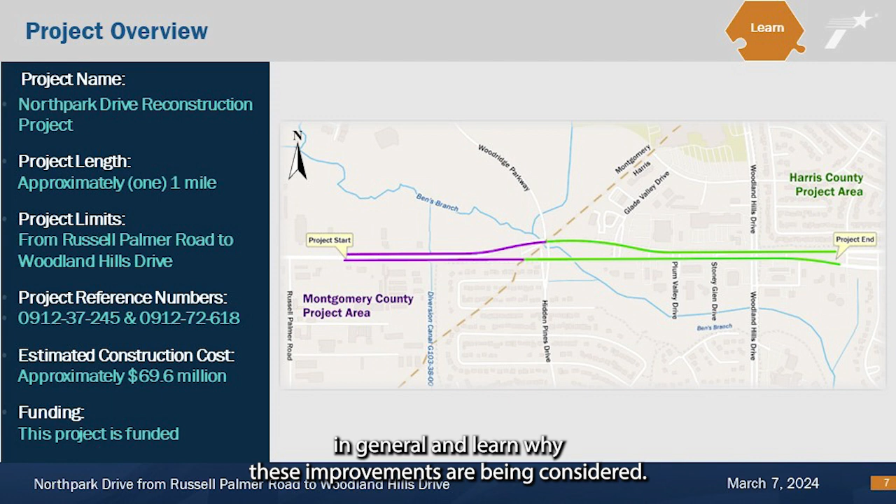As you can see at the top of this slide, we now have a Learn puzzle piece. In this part of the presentation, we will discuss the project in general and learn why these improvements are being considered. The proposed Northpark Drive reconstruction project is located within Harris and Montgomery Counties.

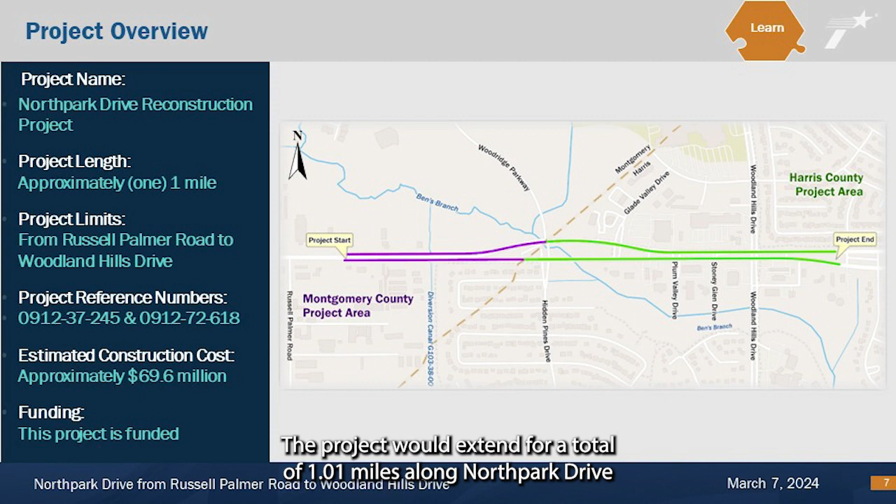The project would extend for a total of 1.01 miles along Northpark Drive from 750 feet east of Russell Palmer Road to 800 feet east of Woodland Hills Drive. The estimated cost of the proposed project is approximately $69.6 million, which would be funded with a combination of federal and local dollars. This information can also be found in the project handout for quick reference.

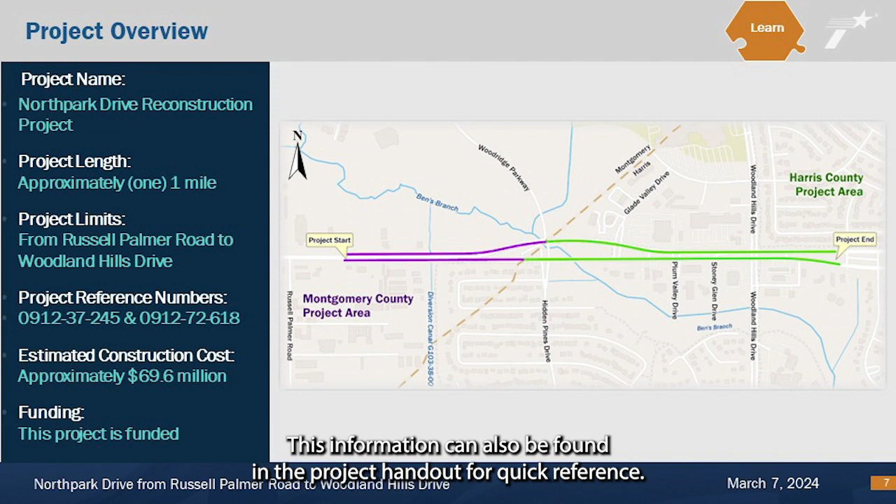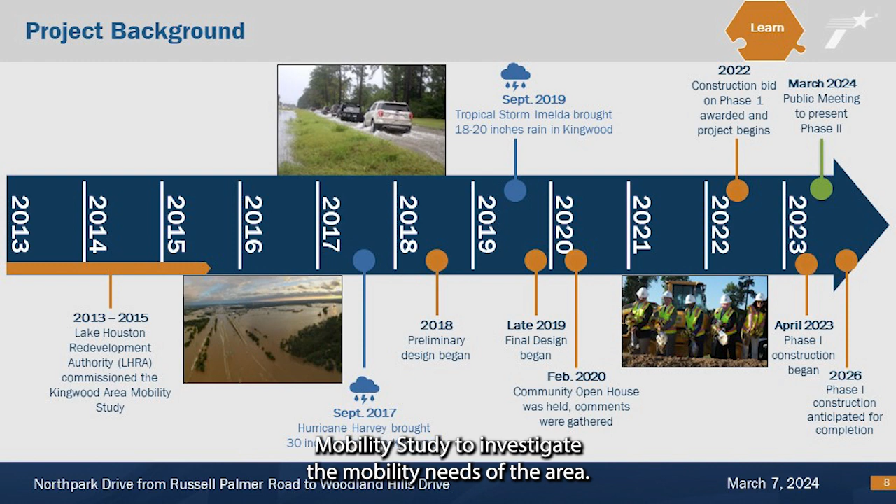For background, in 2013 the Lake Houston Redevelopment Authority, LHRA, commissioned the Kingwood Area Mobility Study to investigate the mobility needs of the area. At the conclusion of the study in May 2015, the Northpark Corridor project was recommended.

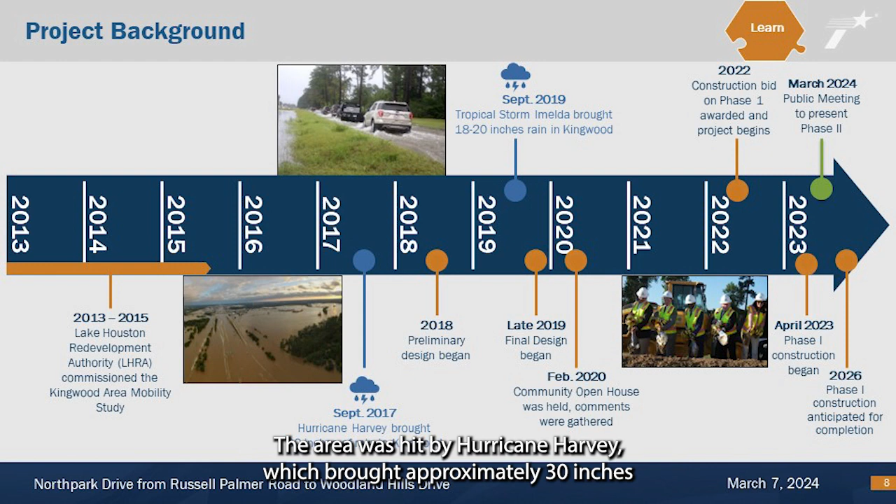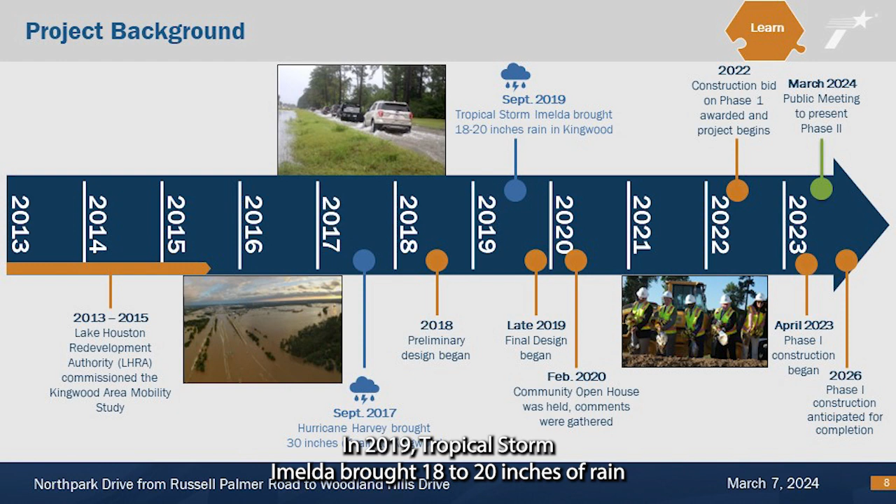In September 2017, the area was hit by Hurricane Harvey, which brought approximately 30 inches of rain in 4 days, affecting several neighborhoods near Northpark Drive. In 2019, Tropical Storm Imelda brought 18 to 20 inches of rain that caused intense flooding, affecting residents, transit, and accessibility.

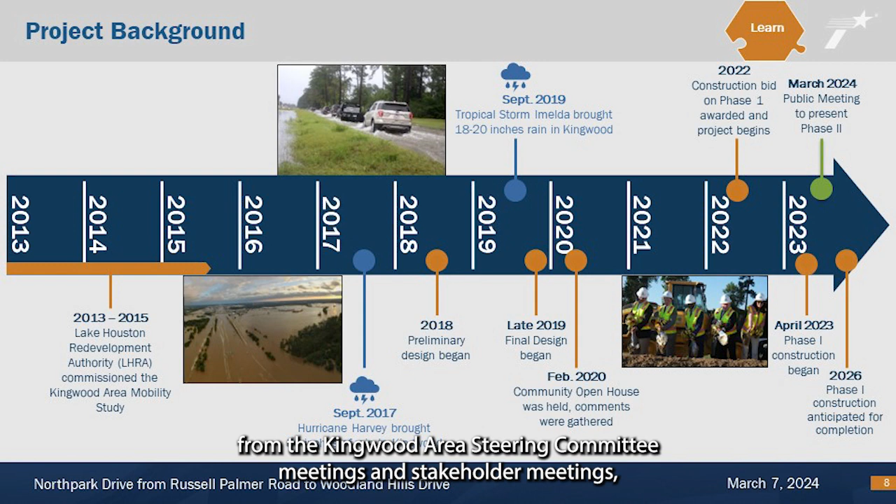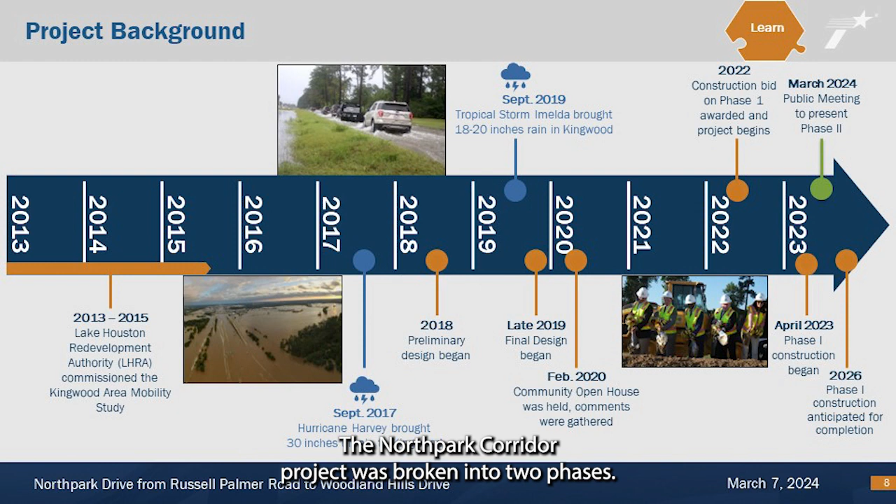This reinforced the need for drainage and construction improvements to Northpark Drive. After these flooding events, and because of continuous feedback from the Kingwood Area Steering Committee meetings and stakeholder meetings, Northpark between I-69 and Woodland Hills Drive was determined as a priority improvement project. The Northpark Corridor project was broken into 2 phases.

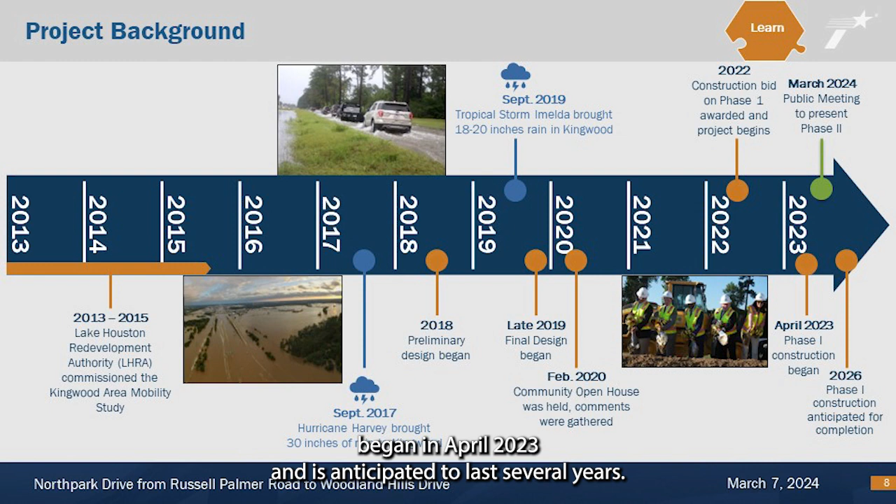Construction on Phase 1, from IH-69 to just east of Russell Palmer Road, began in April 2023 and is anticipated to last several years. This presentation will introduce Phase 2, from 750 feet east of Russell Palmer Road to 800 feet east of Woodland Hills Drive.

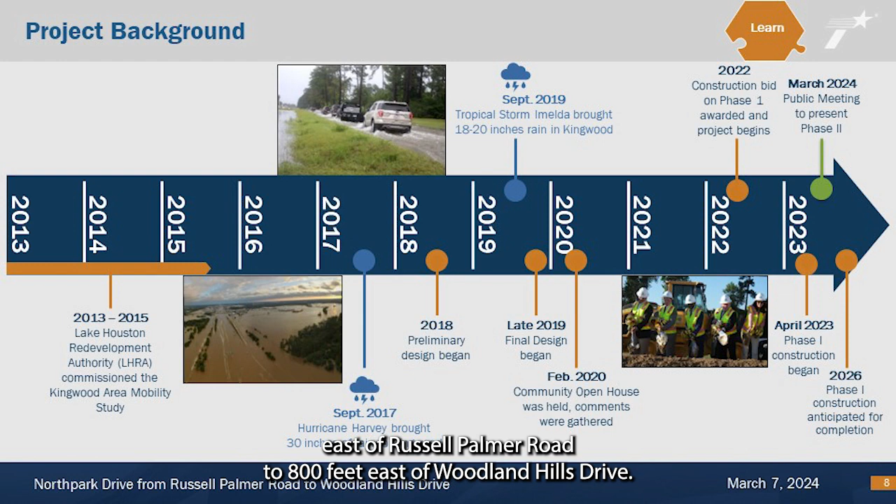When completed, Phase 1 and 2 of the Northpark Drive Corridor project would serve as the only dedicated all-weather event evacuation route for the residents of Kingwood.

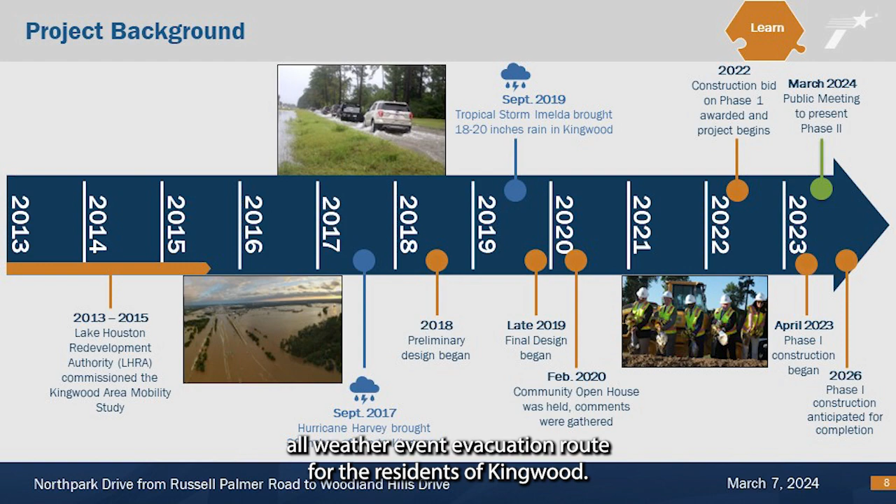This slide shows a zoomed-out visual and the boundaries of the 2 phases of the Northpark Corridor project. Phase 1 shows the Northpark Overpass Project, or Western Phase, in blue, and indicates Northpark Drive at Loop 494 to just east of Russell Palmer Road. This phase is locally funded by the Lake Houston Redevelopment Authority and the City of Houston, TIRZ 10.

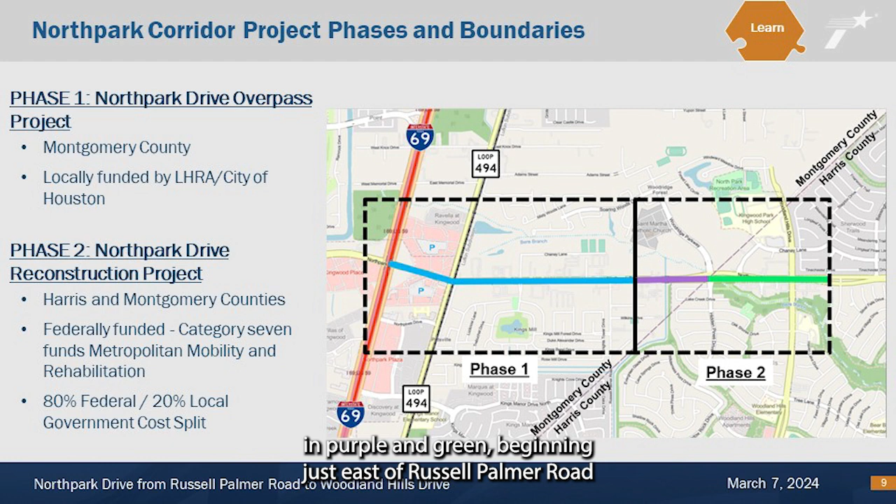The current Phase 2, or Eastern Phase, shows the Northpark reconstruction project that we are presenting today, in purple and green, beginning just east of Russell Palmer Road on Northpark Drive and ending just east of Woodland Hills Drive. This phase is federally and locally funded through a Category 7 grant and local funds.

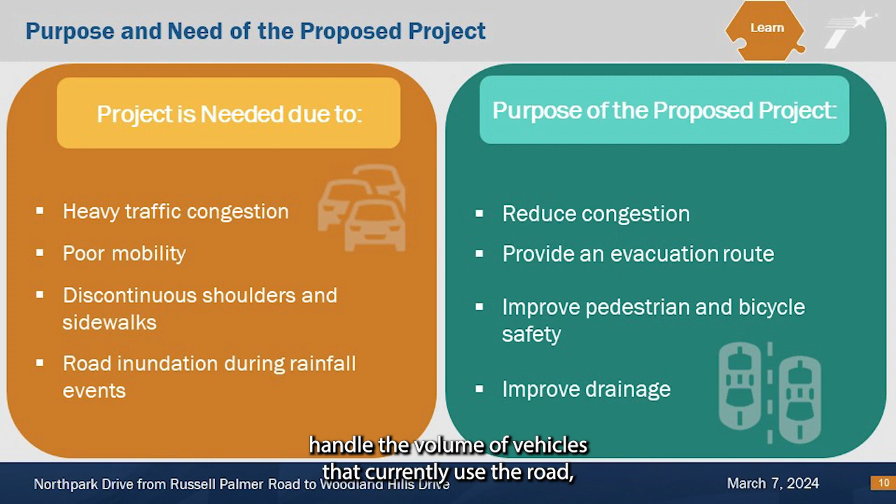The Phase 2 Northpark Drive reconstruction project is needed because the existing number of lanes on Northpark Drive do not efficiently handle the volume of vehicles that currently use the road, which results in heavy traffic congestion. As the area continues to grow, this congestion is expected to worsen.

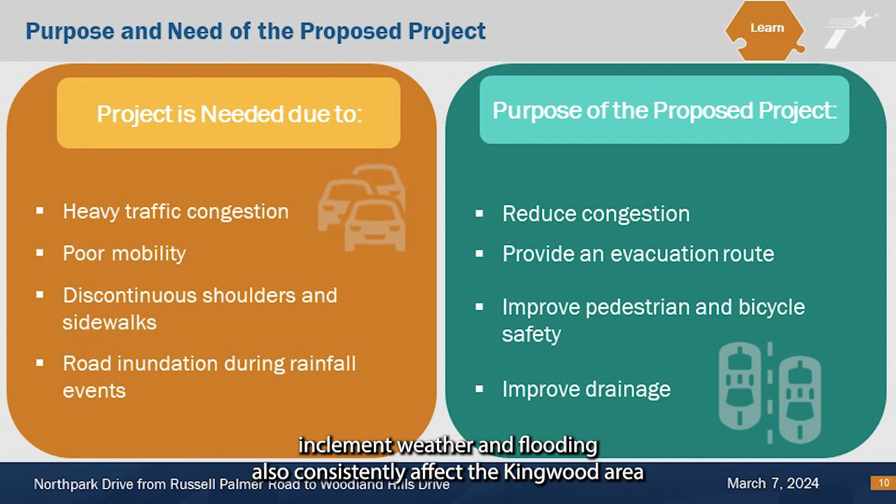As we discussed earlier, inclement weather and flooding also consistently affect the Kingwood area, and Northpark Drive is a necessary evacuation route out of the neighborhoods. Also, the lack of adequate drainage reinforces the need for the proposed improvements, and there are no continuous sidewalks or bicycle facilities along Northpark Drive.

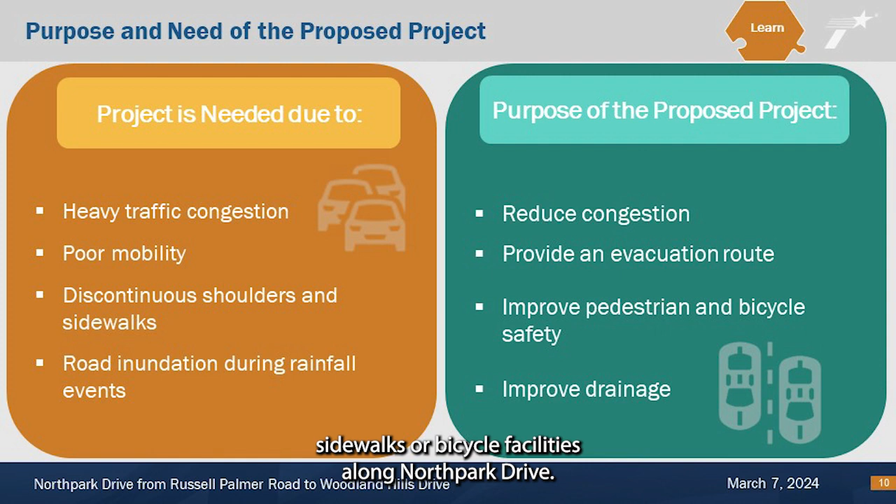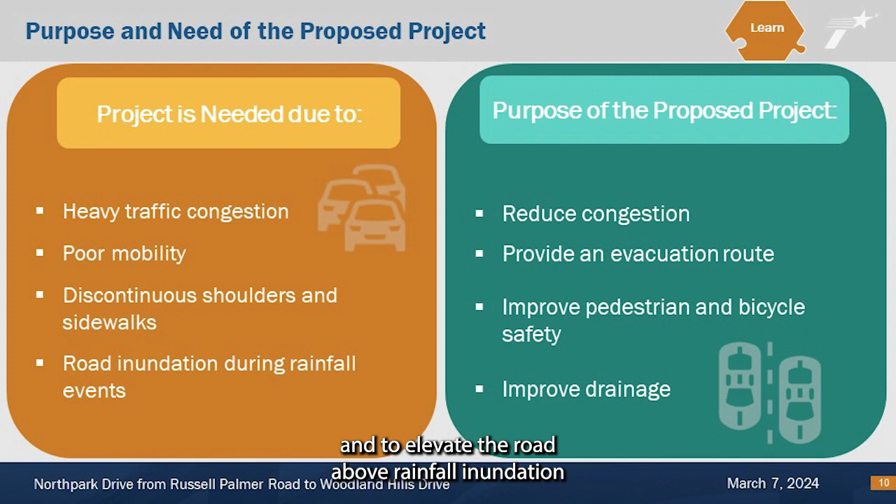The overall purpose of the project is to reduce traffic congestion, improve stormwater conveyance and drainage, provide a viable evacuation route to I-69, improve pedestrian and bicycle safety, and elevate the road above rainfall inundation levels during rain events on Northpark Drive between the limits of Russell Palmer Road to Woodland Hills Drive.

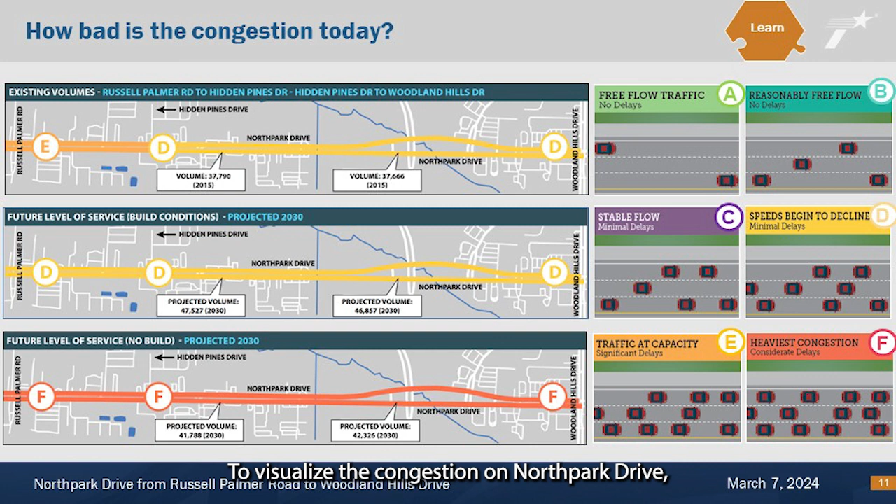To visualize the congestion on Northpark Drive, the project team studied the level of service. You can think of level of service as a grade given to a roadway to gauge how well it handles the traffic that is there today.

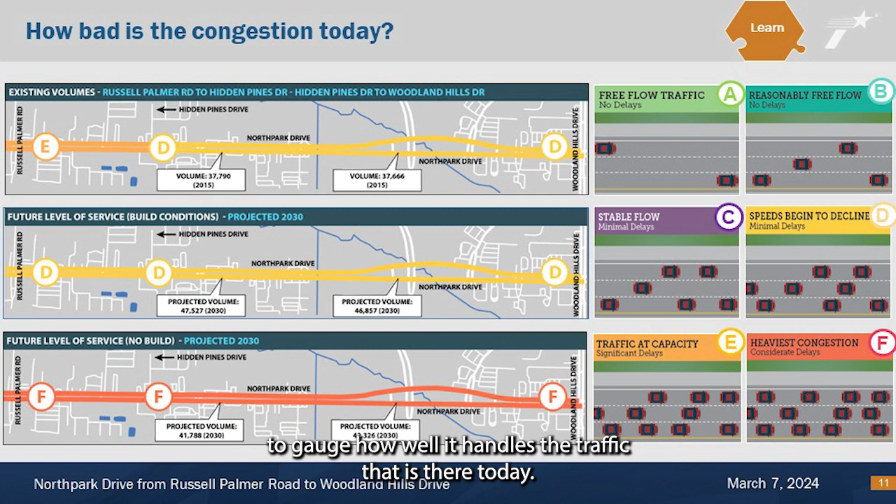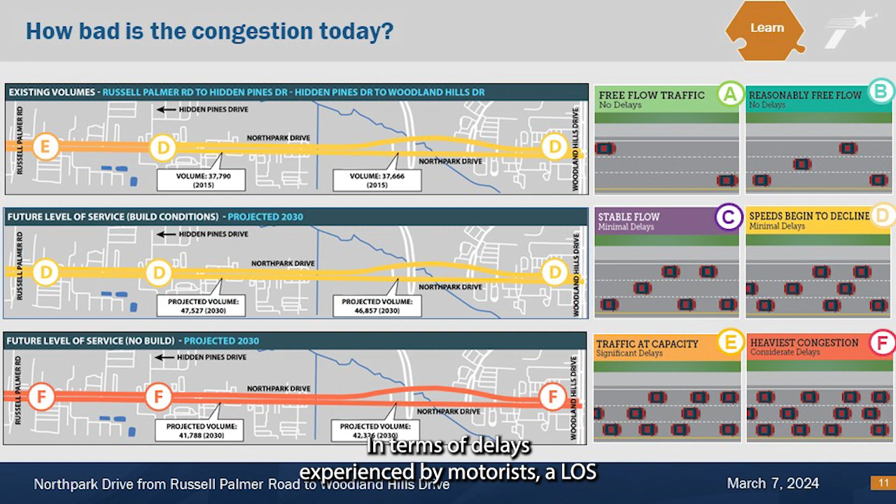Much like grades in school, level of service ranges from A, free-flowing traffic shown in light green, to F, which is heavily congested shown in red. In terms of delays experienced by motorists, an LOS A through D is considered acceptable or passing, and an LOS E or F is considered unacceptable or failing.

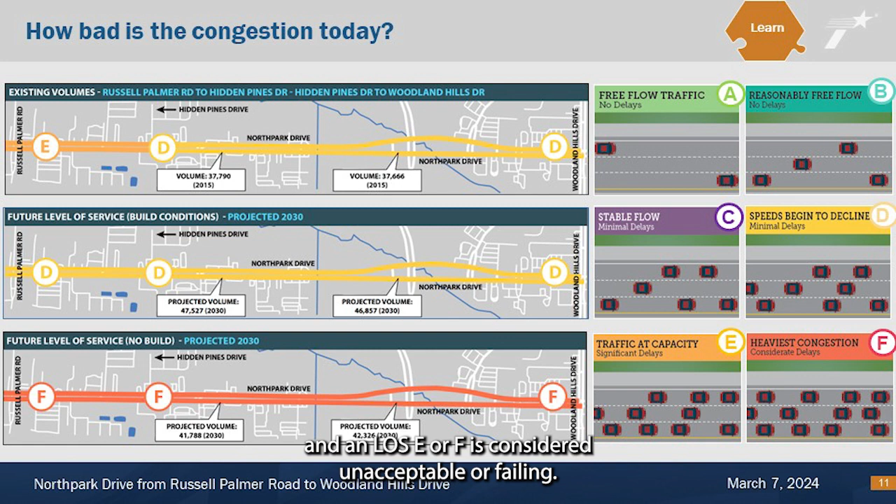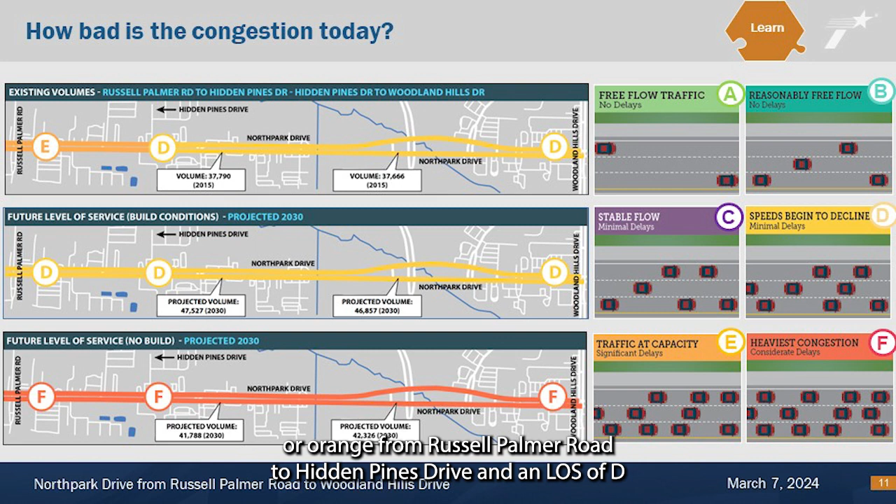As you can see on the left part of the slide, the existing roadway is currently operating at capacity with an LOS of E, or orange, from Russell Palmer Road to Hidden Pines Drive, and an LOS of D, or yellow, from Hidden Pines Drive to Woodland Hills Drive.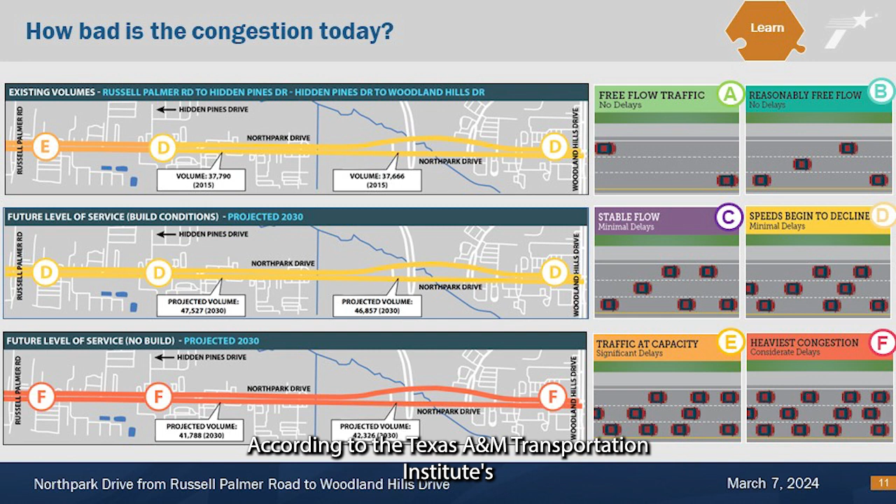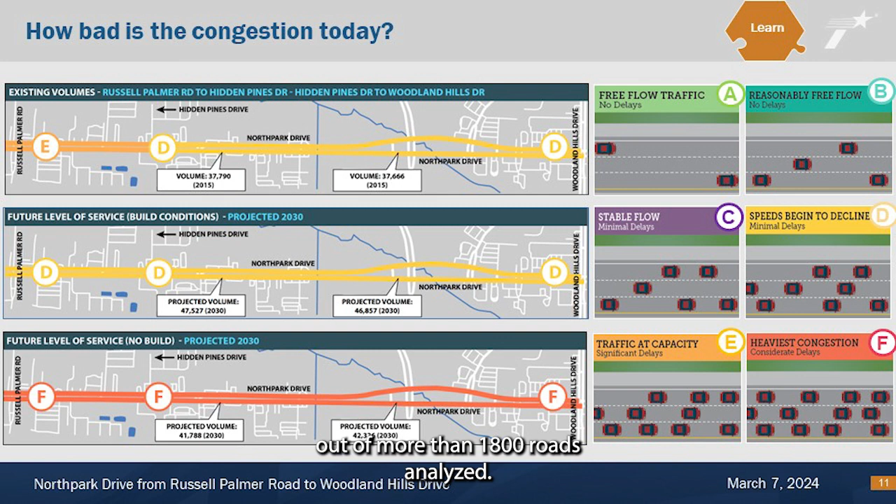According to the Texas A&M Transportation Institute's 2022 Most Congested Roadways in Texas report, Northpark Drive ranked in the top 10% most congested roadways in the state, out of more than 1,800 roads analyzed. On average, more than 37,000 vehicles traverse Northpark Drive every day.

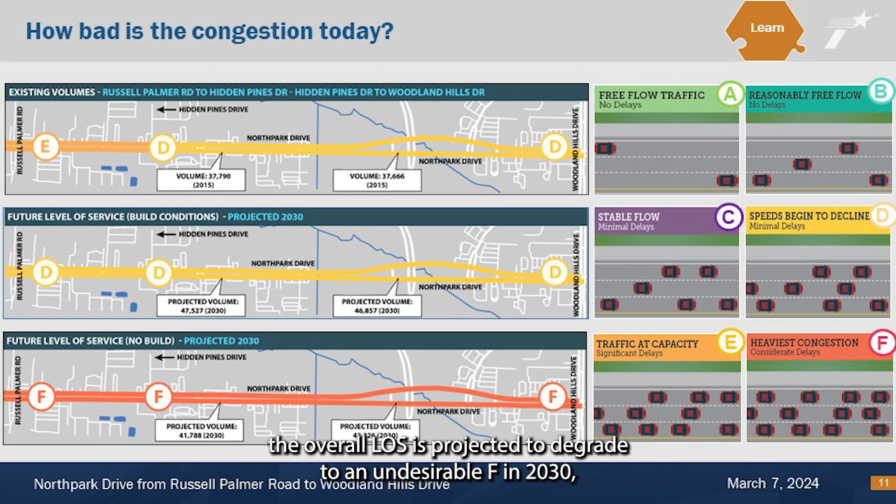Without the completion of the Northpark Drive reconstruction project, the overall LOS is projected to degrade to an undesirable F in 2030, with drivers experiencing heavy delays during peak traffic hours. With the lane improvements from this proposed project, future traffic would operate at an acceptable LOS of D or above.

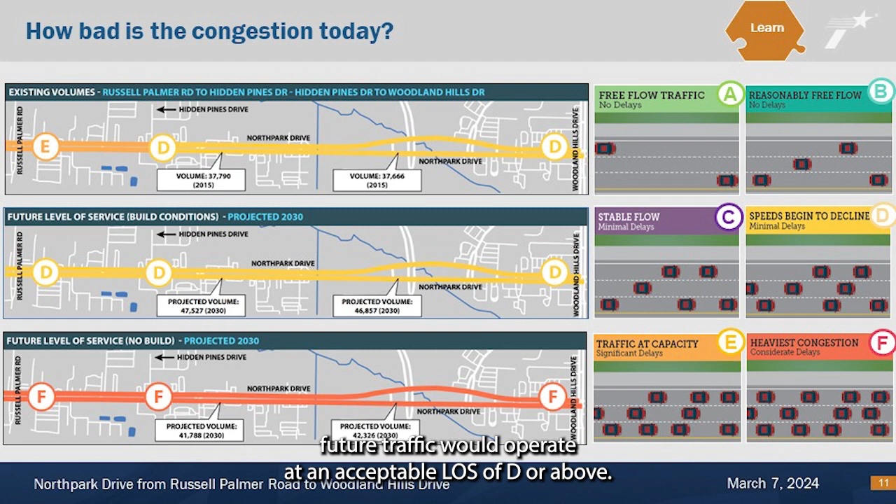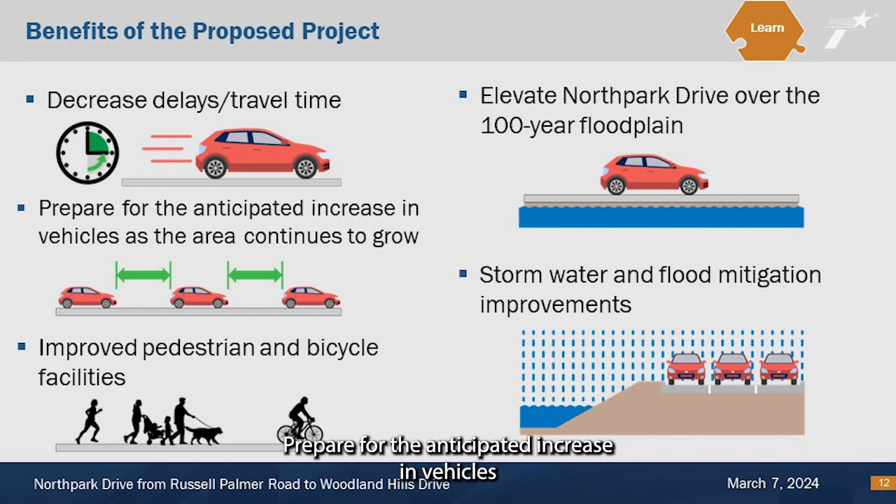The benefits of the proposed project would include decreasing the daily delays and slowdowns in travel time, improved mitigation of stormwater and rainfall inundation, preparing for the anticipated increase in vehicles that use Northpark Drive as the area continues to grow, and improved pedestrian facilities, including bicycle shared use paths.

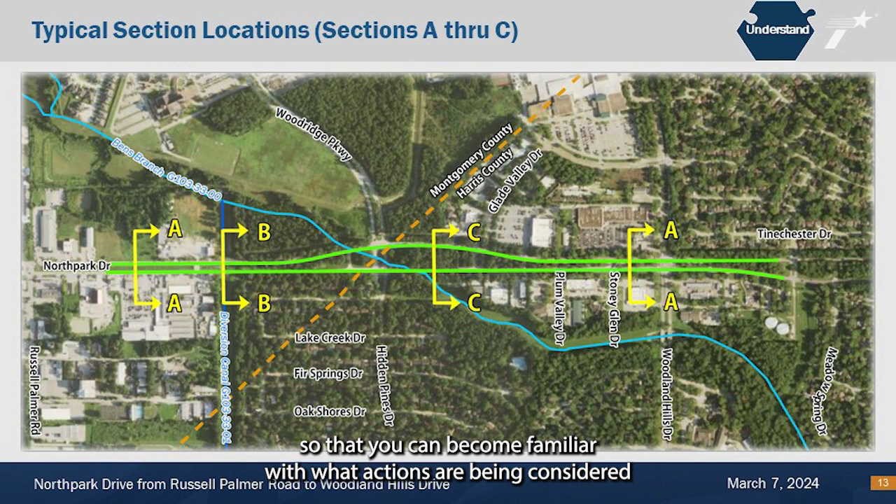As you can see from the top of the slide, we now have the Understand puzzle piece. In this part of the presentation, we will introduce the proposed improvements so that you can become familiar with what actions are being considered and provide informed feedback.

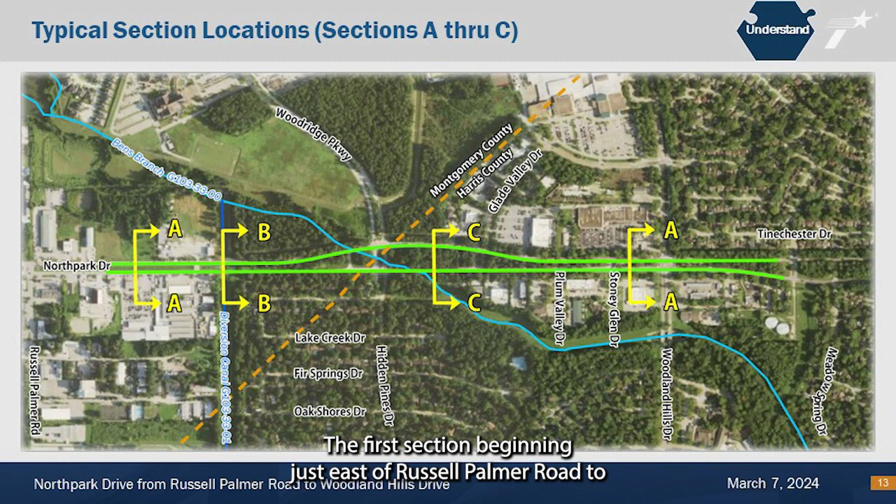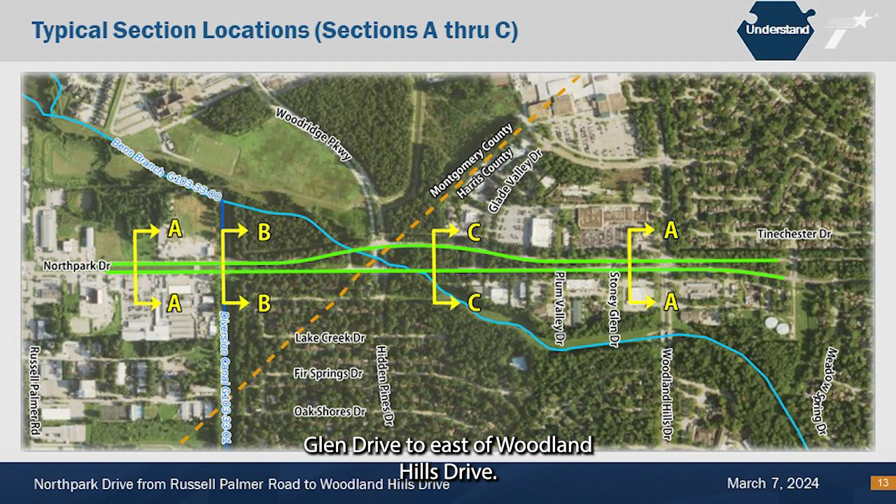Northpark Drive can be separated into distinct sections. This slide illustrates the limits of each section. Section A covers two segments of the Northpark corridor: the first beginning just east of Russell Palmer Road to Kingwood Diversion Ditch, and the second beginning east of Stoney Glen Drive to east of Woodland Hills Drive. Section B covers the limits of the Kingwood Diversion Ditch crossing to west of Glade Valley Drive. Section C begins west of Glade Valley Drive to east of Stoney Glen Drive.

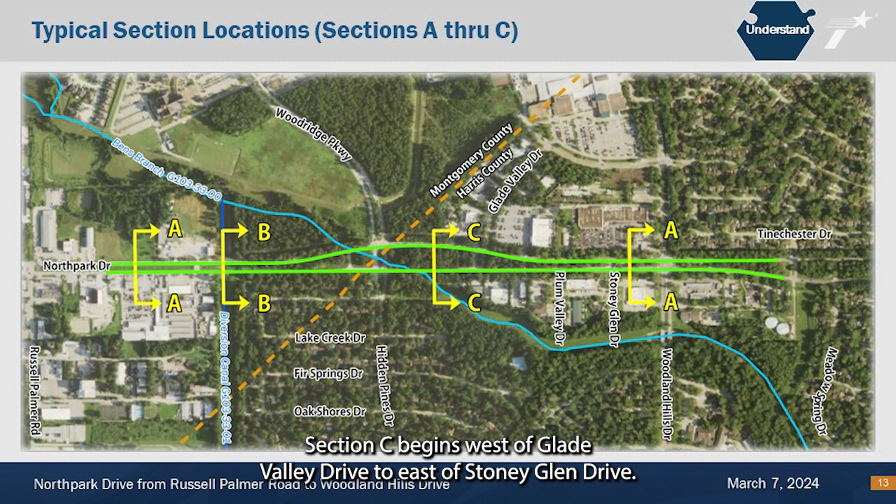Let's take each section one at a time. The different configurations of these sections are illustrated using typical sections, which are cross-sections of how the roadway looks today or would look with the proposed improvements. The map is shown on the slide for easy reference.

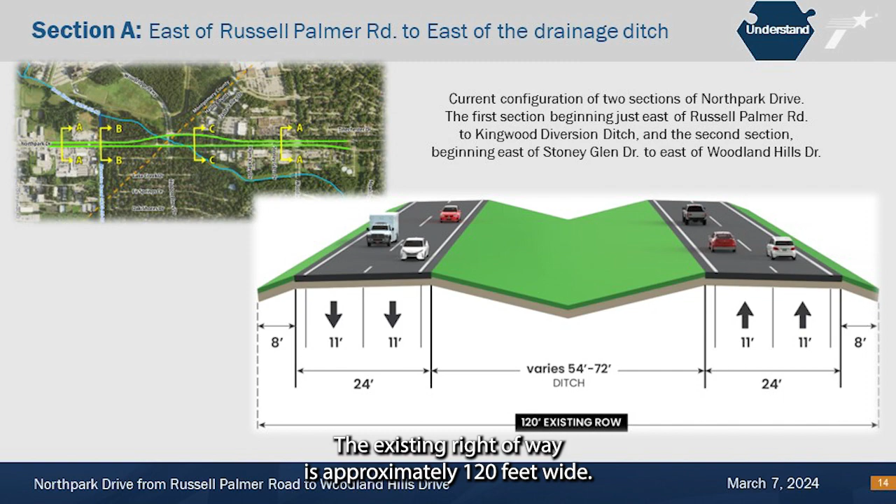Today, Section A has 4 11-foot wide travel lanes, 2 in each direction, and 2 1-foot wide curb offsets on each side. The grass ditch median varies between 54 and 72 feet wide. The existing right-of-way is approximately 120 feet wide.

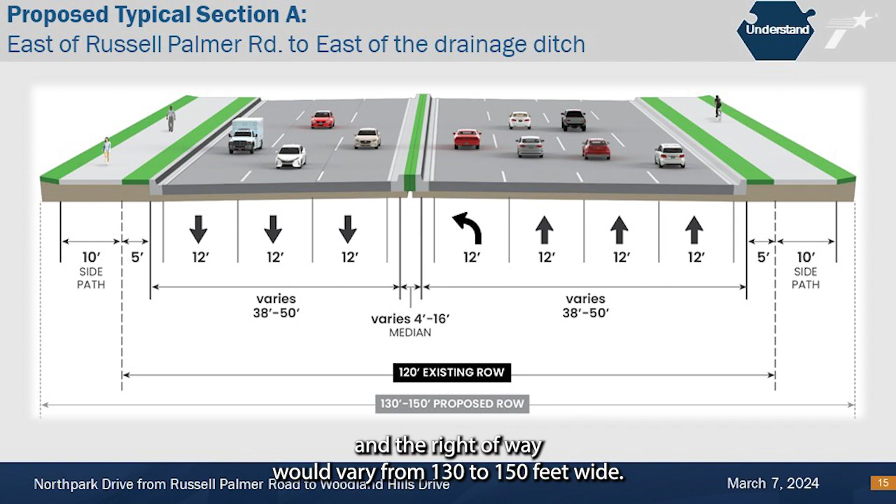The proposed Section A, shown here, would have 6 12-foot wide travel lanes, 3 in each direction, with raised medians varying in width from 4 to 16 feet wide, and 1 12-foot wide turning lane at cross streets. 2 10-foot wide side paths would be added to accommodate bicyclists and pedestrian traffic, and the right-of-way would vary from 130 to 150 feet wide.

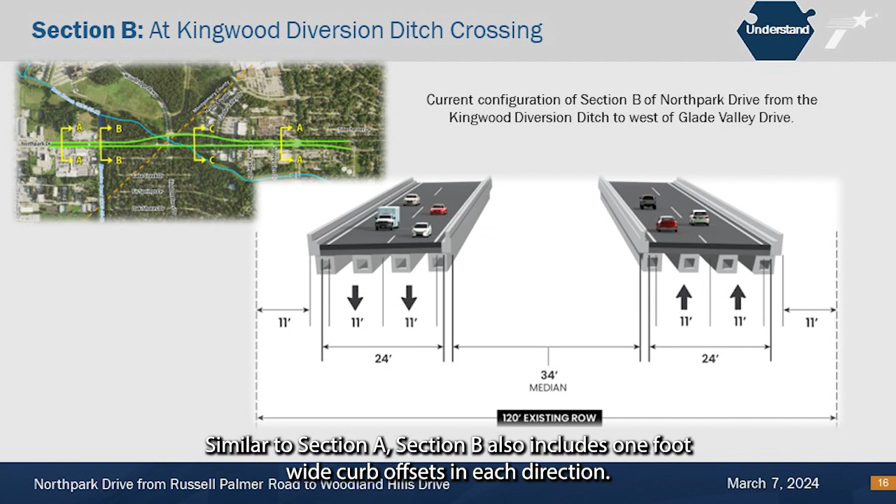Existing Section B is comprised of 2 32-foot wide bridges. Each bridge includes 2 11-foot wide travel lanes, 2 in each direction. Similar to Section A, Section B also includes 1-foot wide curb offsets in each direction.

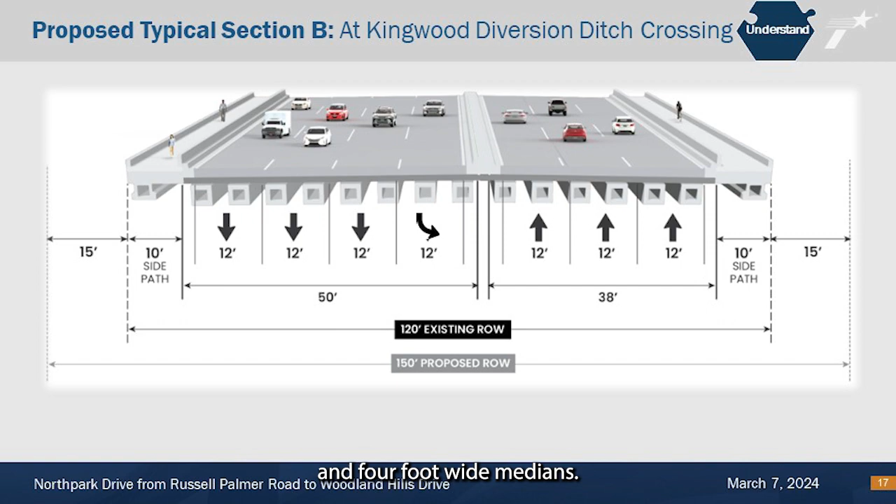Proposed typical Section B would be comprised of a 116-foot wide bridge spanning across the Kingwood Diversion Ditch. There would be 6 12-foot wide travel lanes and 2-foot wide outside buffers in each direction and 10-foot wide side paths for pedestrians and bicyclists. There would also be a 12-foot wide turning lane running westbound and 4-foot wide medians. The proposed minimum right-of-way would increase to 150 feet wide.

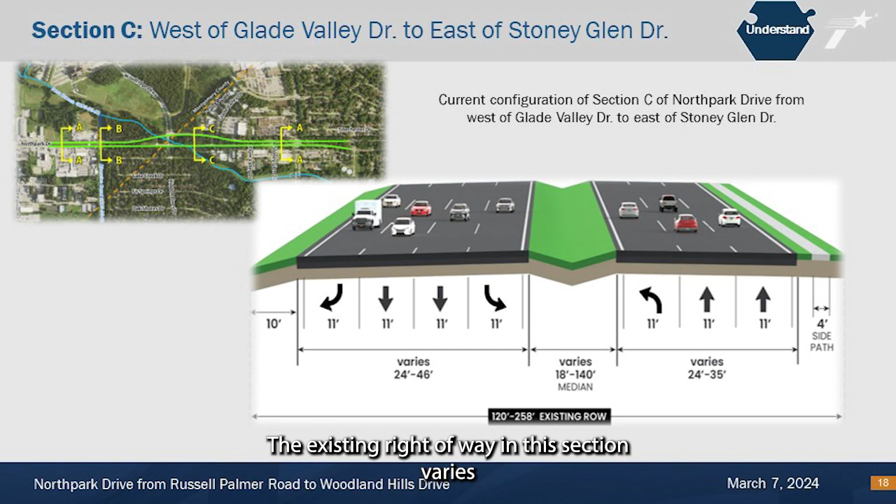The existing typical Section C has 4 11-foot wide travel lanes, 2 in each direction. There are also 11-foot wide left and right turning lanes at cross streets with 1-foot wide curb offsets in each direction. There are grassy medians between 18 and 140 feet wide with a 10-foot wide grassy shoulder running westbound outside of the lanes and a 4-foot wide sidewalk running eastbound. The existing right-of-way in this section varies between 120 and 258 feet wide.

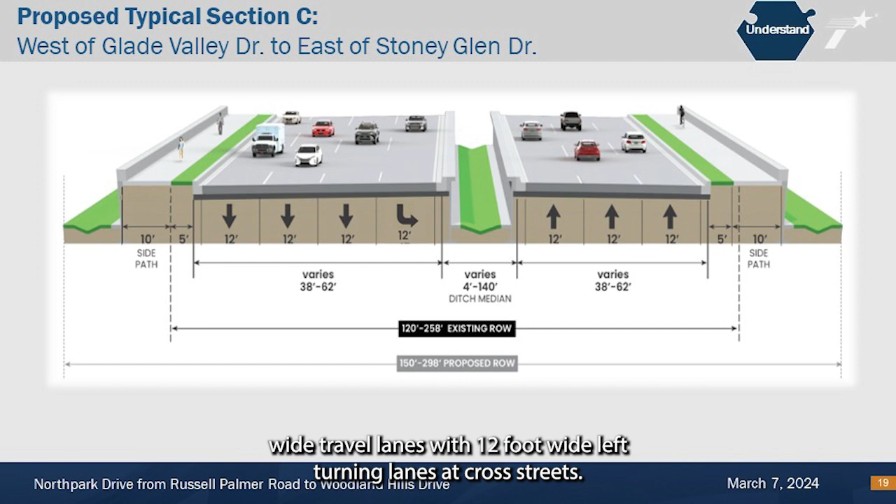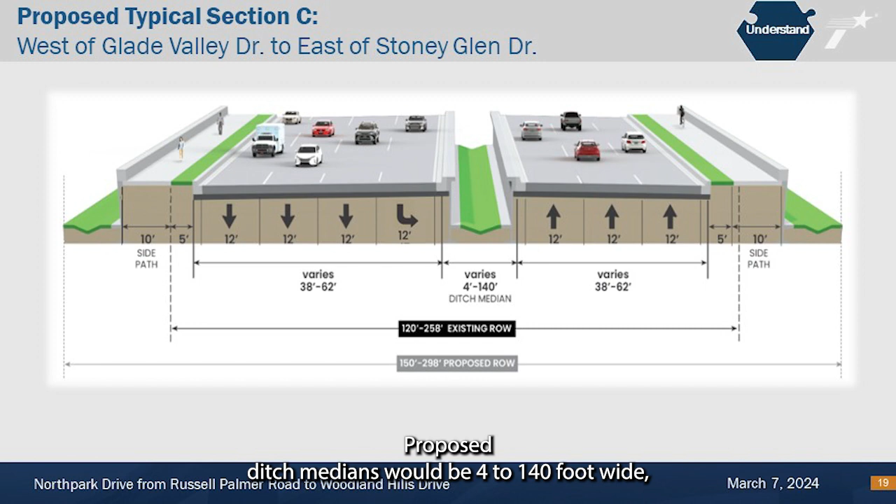Proposed typical Section C would also include 6 12-foot wide travel lanes with 12-foot wide left turning lanes at cross streets. There would also be 2 5-foot wide outside buffers and 10-foot wide side paths in each direction. Proposed ditch medians would be 4 to 140 feet wide with retaining walls constructed to separate the travel lanes and to reduce the impact on existing trees.

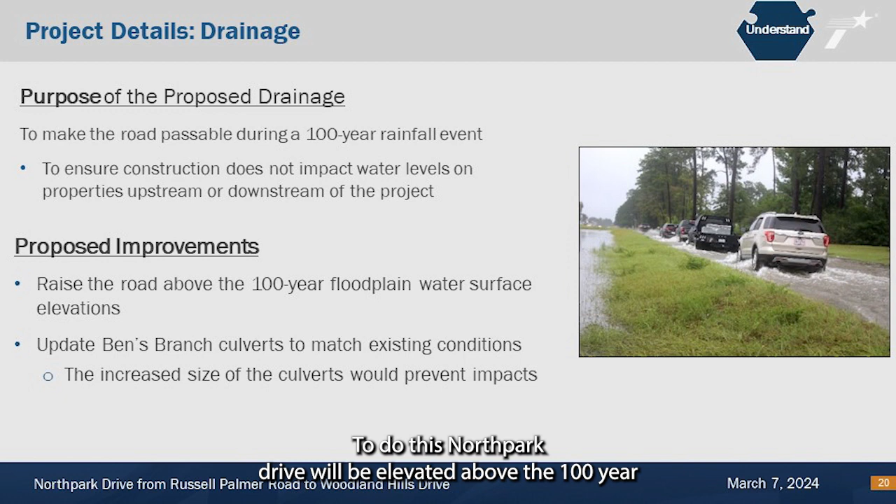One of the primary goals of this project is to prevent Northpark Drive from being inundated by stormwater from Ben's Branch during major storm events. To do this, Northpark Drive will be elevated above the 100-year floodplain, and larger box culverts are proposed to allow stormwater to pass underneath the road.

While considering options for improving drainage, it is also important to ensure these improvements do not impact water levels upstream or downstream of the project. All drainage design is based on using the most current Atlas 14 rainfall data that has been adopted by the City of Houston, TxDOT, and the Harris County Flood Control District.

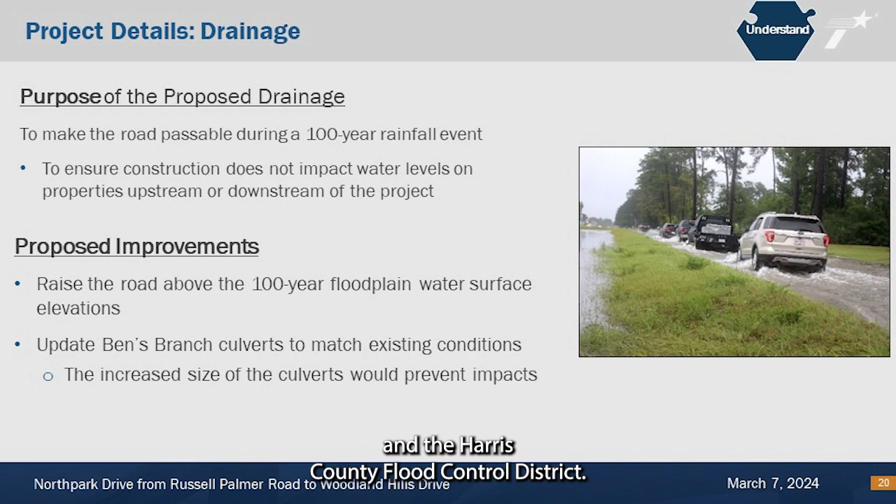The left side of this graphic illustrates the existing crossing at Ben's Branch, which is frequently overwhelmed by extreme rainfall events. This illustrates that during large amounts of rain, the culverts under the road are completely filled with water, which causes water to overflow onto Northpark Drive.

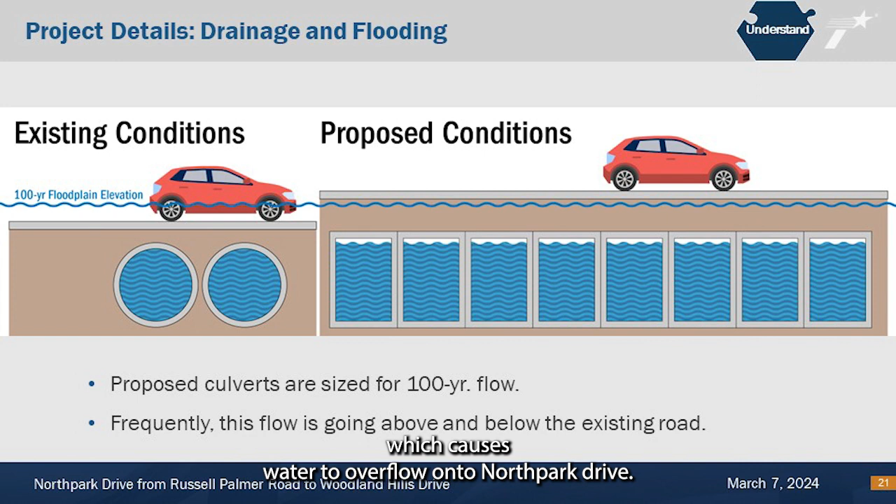The right side of the graphic illustrates how Northpark Drive would be elevated above the 100-year floodplain. The small culverts would be replaced with larger box culverts to provide more underground storage for water during heavy rains. In addition, other channel improvements are planned on Ben's Branch upstream of the proposed culverts to maintain existing flows downstream for more frequent rainfall events such as 2- and 10-year storms.

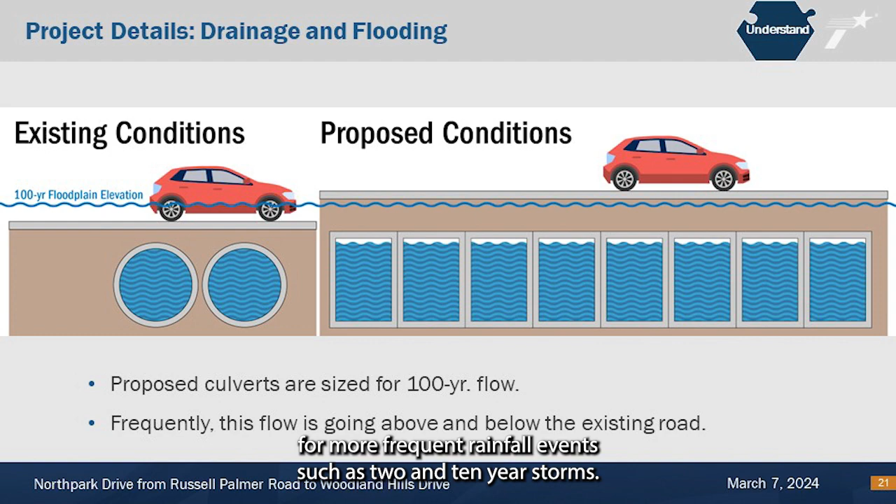The proposed project would require the acquisition of approximately 6 to 38 feet of right-of-way, ROW, along the north and south sides of Northpark Drive, resulting in a new ROW width of 126 to 298 feet.

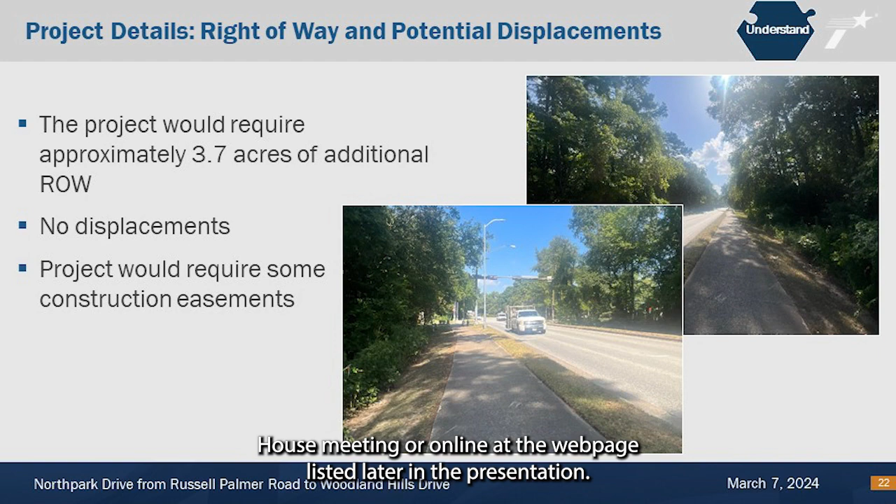The project would require approximately 3.7 acres of additional right-of-way and would result in 34 partial acquisitions of adjacent property, but no displacements. The proposed right-of-way line can be viewed on the layouts at the open house meeting or online at the webpage listed later in the presentation.

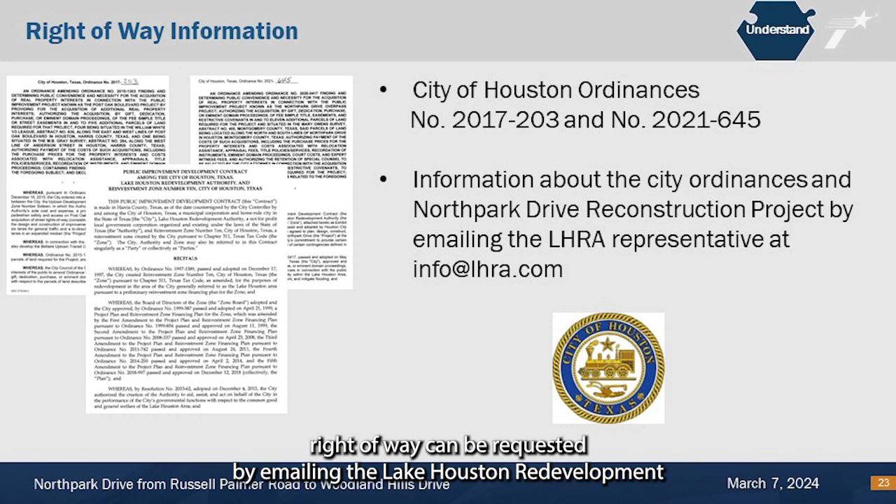If you have any questions about how your property may be impacted, information about the City of Houston property ordinances and Northpark Drive right-of-way can be requested by emailing the Lake Houston Redevelopment Authority representative at info@lhra.com.

This project is receiving federal funds, and because of the federal component, TxDOT is required to assess the potential environmental effects of the proposed project in accordance with federal standards. The process followed is called the National Environmental Policy Act process, otherwise known as NEPA. The NEPA process provides analyses of the potential impacts to the natural and man-made environment and helps the decision maker make an informed decision on whether or not to proceed with the project.

On December 9, 2019, TxDOT received a signed Memorandum of Understanding from the Federal Highway Administration that permits TxDOT to assume responsibility from the Federal Highway Administration for reviewing and approving certain assigned NEPA projects. This review and approval process applies to this project.

The project team is identifying and evaluating potential environmental impacts that could occur as a result of constructing the proposed project. Areas under review include biological resources, community impacts, environmental justice, water resources, hazardous materials, archaeological resources, historic resources, and traffic noise. The project would be designed to avoid or minimize impacts to the greatest amount practicable. Once completed, technical reports documenting the analysis and conclusions of these studies will be available for review upon request.

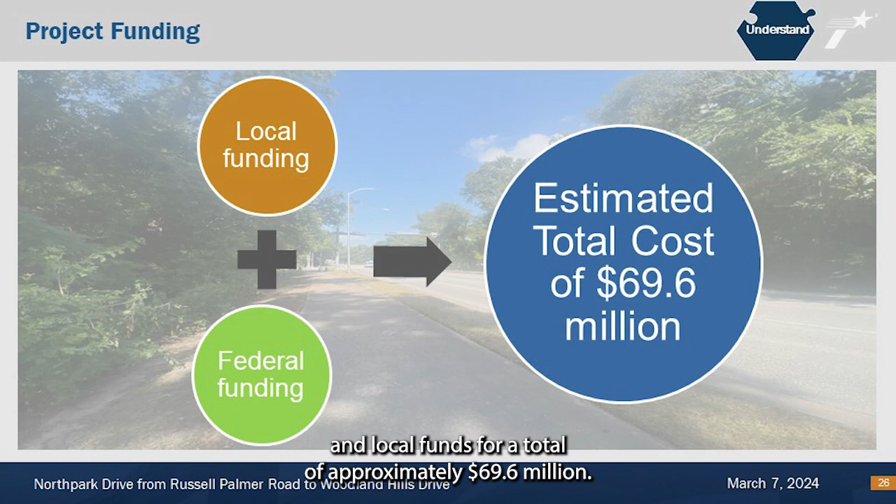After the comment period closes, the project team will review the comments received, make appropriate design changes, and prepare official public meeting documentation. Public meeting documentation will be posted to the project meeting webpage after the close of the comment period. The next steps include receiving an environmental decision, beginning detailed design activities, and acquiring right-of-way.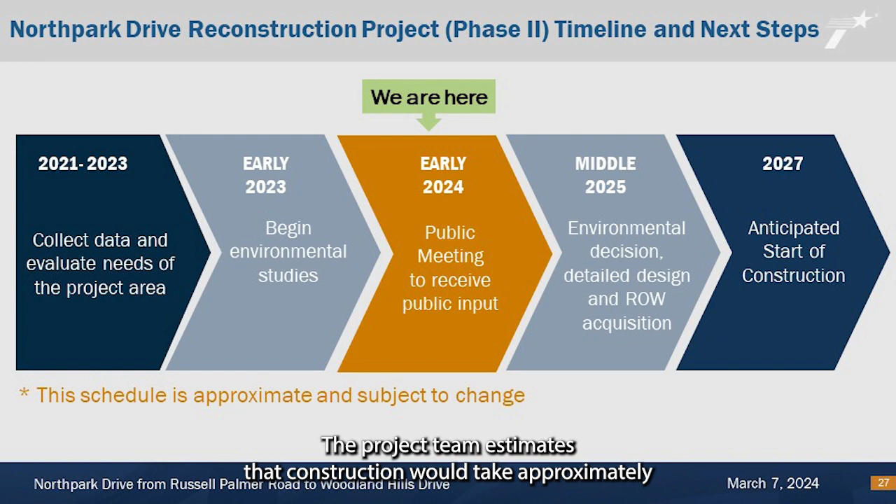A letting date is to be determined. However, federal funding is scheduled for 2027. The project team estimates that construction would take approximately 2.5 years.

TxDOT encourages you to review the materials regarding the proposed project and provide feedback. You may submit comments in the following ways: download the comment card from the project webpage at www.txdot.gov/projects/hearings-meetings.html and email it to hou-pio-webmail@txdot.gov, or fill out the comment card at the open house and drop it in the comment box.

Mail the comment card to TxDOT Houston District, Attention Advanced Project Development Director, P.O. Box 1386, Houston, Texas 77251-1386. Comments must be received or postmarked by Friday, March 22, 2024 to be included in the public meeting documentation.

Responses to verbal and written comments received during the comment period will be included in the public meeting documentation that will be posted on the project webpage when complete.

Please don't hesitate to contact us with any questions, and feel free to contact Elizabeth Moreau at the TxDOT Houston District office by phone at 713-802-5223 or email at elizabeth.moreau@txdot.gov with any questions or comments at any time during the project development process.